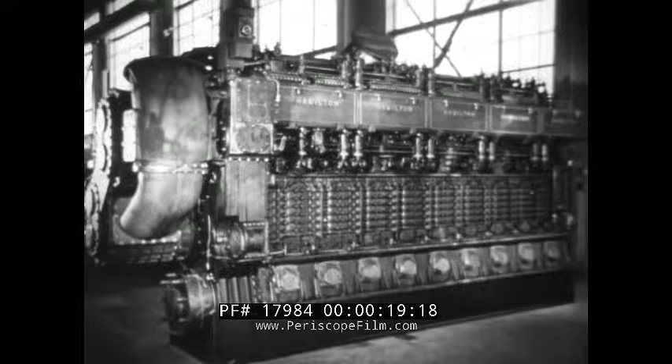Long ago, the people of southeastern Asia made use of an ingenious device called the fire piston or fire syringe. This consisted of a hollow tube, closed at one end, and a round stick that fitted snugly into the tube.

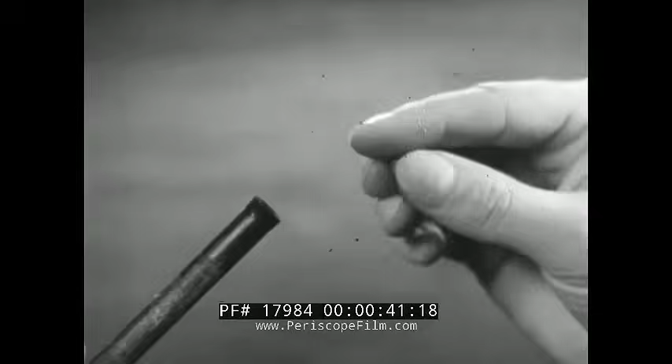Tinder was placed at the end of the round stick. Then when this stick or plunger was inserted into the tube and driven down quickly, the tinder took fire and burned.

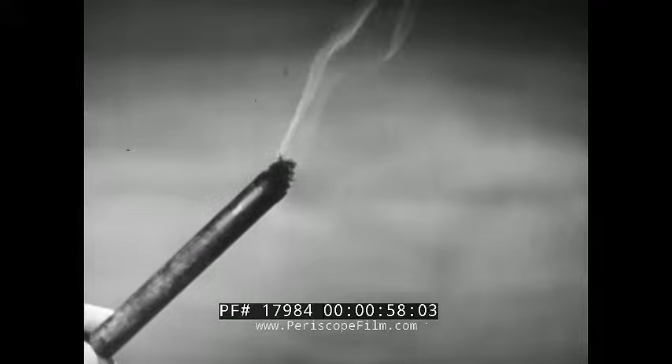Let's see what happens inside this fire-making apparatus. As the round stick or plunger moves down the tube, the air in the tube is trapped, squeezed into a smaller and smaller space. Finally, the tinder at the end of the plunger ignites.

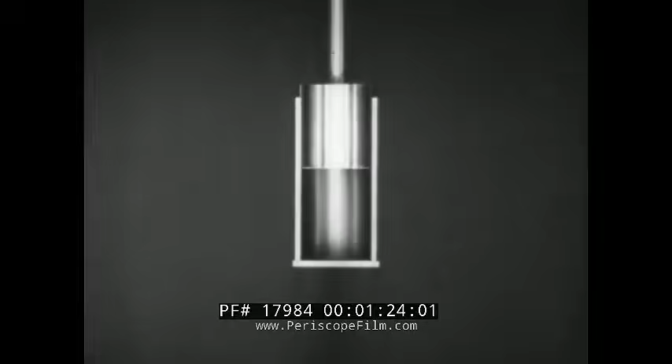To understand how this happens, let's construct a modern fire syringe. First, we turn the apparatus upside down. Then we put two thermometers in convenient places.

One of these thermometers will record the temperature of the air inside the cylinder, and the other registers the room temperature. Next, we add an instrument for measuring the air pressure in the cylinder in pounds per square inch.

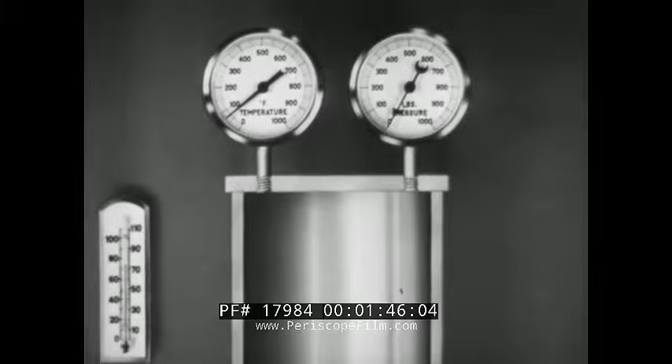With the piston in the down position, the pressure gauge on our apparatus reads 0, and both thermometers are at room temperature, 74 degrees.

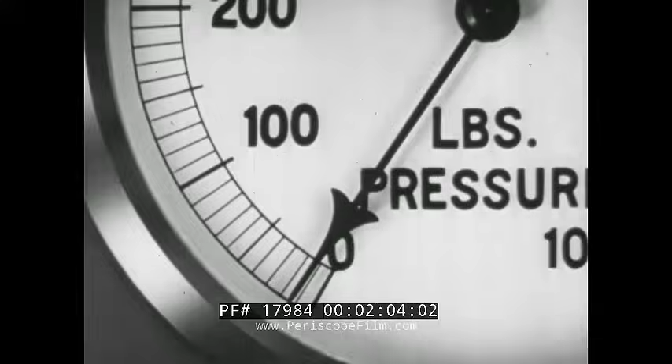We start compressing the air. As the piston goes up, the pressure rises. The temperature outside the cylinder remains the same. But inside the cylinder, the more the air is compressed, the higher the temperature goes.

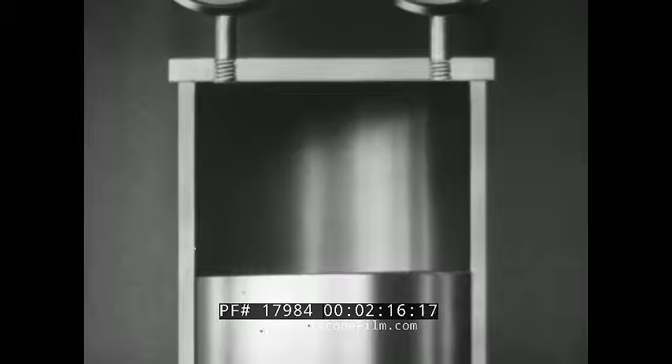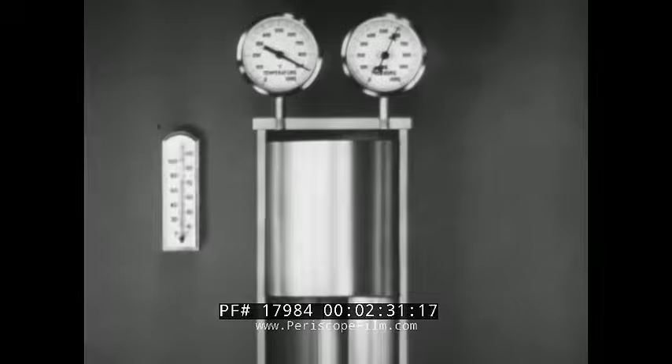Now the air in the cylinder is hot enough to boil water. Higher and higher go temperature and pressure. Now it's hot enough to melt tin, until finally the air is squeezed into about 1/16 of the space it occupied before we started compressing it.

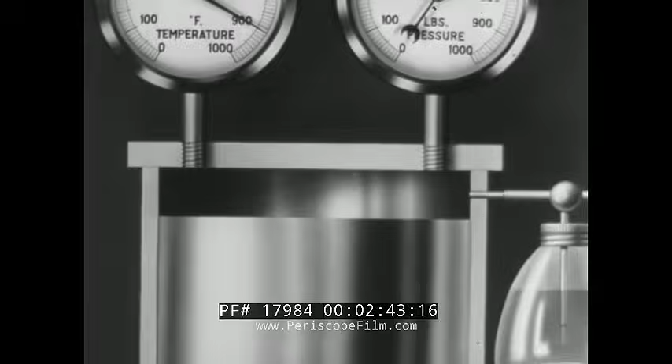At this point, the pressure and the temperature of the air within the cylinder are both extremely high - so high that a mist of oil sprayed into it will take fire and burn. This shows us that highly compressed air gets hot enough to ignite fuel oil.

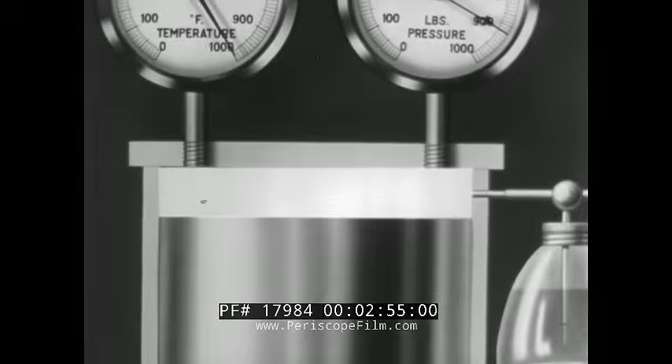This principle, called compression ignition, was first developed by Rudolf Diesel.

Now let's examine another phenomenon. We stretch a piece of rubber sheeting over the mouth of a container and place the container over a flame. As the rubber sheeting puffs out like a balloon, we see that air or gas expands when it is heated.

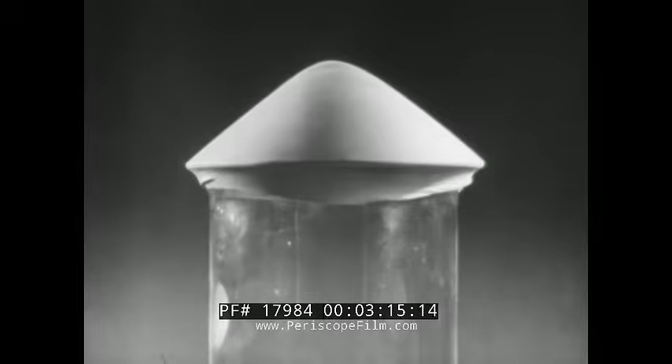Now let's see how this principle applies to our apparatus. First, the air in the cylinder becomes hot from compression. Then the burning oil raises the temperature still higher. This additional heat causes the gases to expand, forcing the piston down.

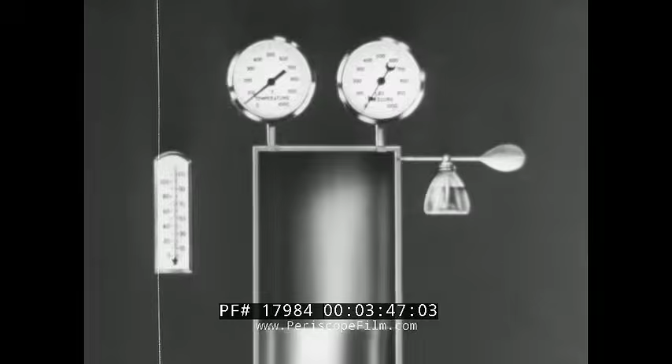Now let's convert this apparatus into a mechanism which will apply these principles of compression ignition and expansion to provide usable power. First, we take away the pressure gauge and the thermometers and strengthen the walls of the cylinder to withstand continued high temperatures and pressures.

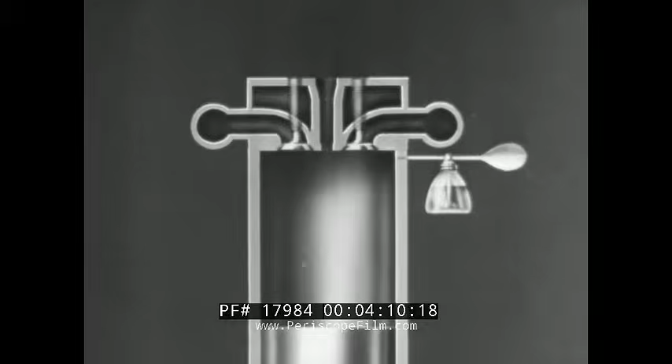We also need a couple of pipes or manifolds, one to bring fresh air into the cylinder, the other to carry the burned gases away, and two valves to seal the air in the cylinder while it is being compressed and while the oil is burning.

Next, we install a better atomizer, which we shall call the fuel injection unit.

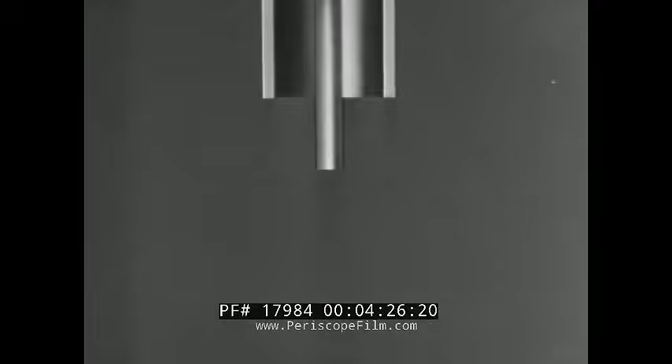Then, in order to transform the up and down motion of our piston into more convenient rotary motion, we change the piston rod to a connecting rod and add a crankshaft. And finally, to support our mechanism, we add a housing and a base.

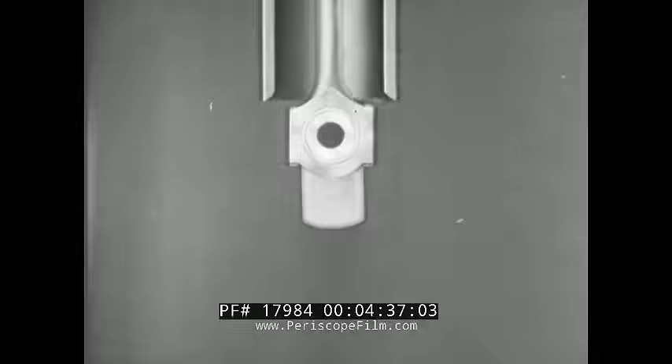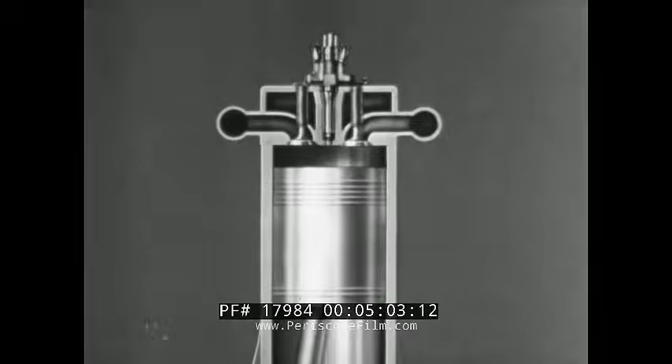Now let's see how this engine works. First, the intake valve opens, and as the piston moves downward, fresh air is drawn into the cylinder. Next, the intake valve closes, tightly sealing the air in the cylinder as the piston moves upward on its compression stroke. The fuel injection unit sprays fuel into the highly compressed hot air.

The oil burns, and temperature and pressure increase enormously, driving the piston down. The exhaust valve opens, the piston moves up, and the gases resulting from combustion are forced out.

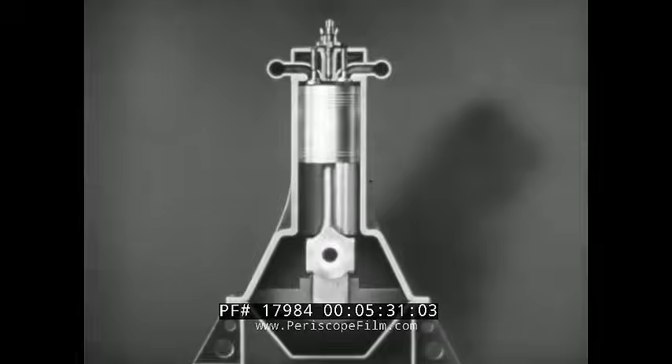This engine is called a four-stroke cycle diesel engine. One of every four strokes is a power stroke: intake, compression, power, exhaust. These four strokes of the piston occur every two revolutions of the crankshaft.

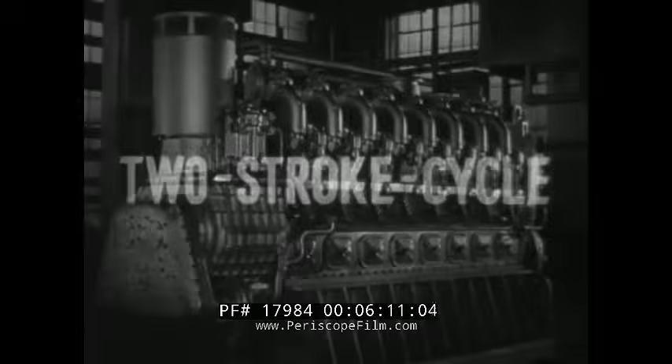In the 2-stroke cycle engine, the functions of intake, compression, power, and exhaust are performed in 2 strokes of the piston. This can be accomplished in several ways.

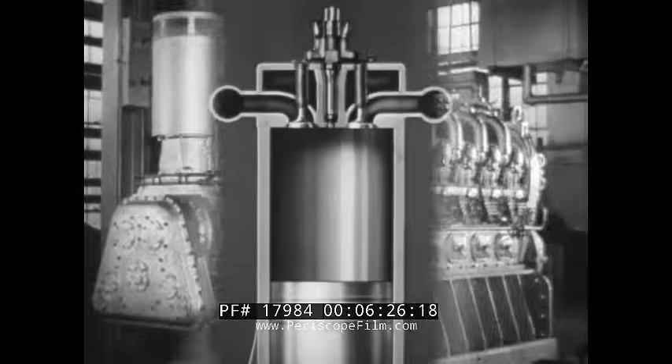In one design, the intake valve of the 4-stroke cycle engine is replaced by a row of openings in the cylinder wall. These are called intake or scavenge ports, which are supplied by a manifold with fresh air under pressure.

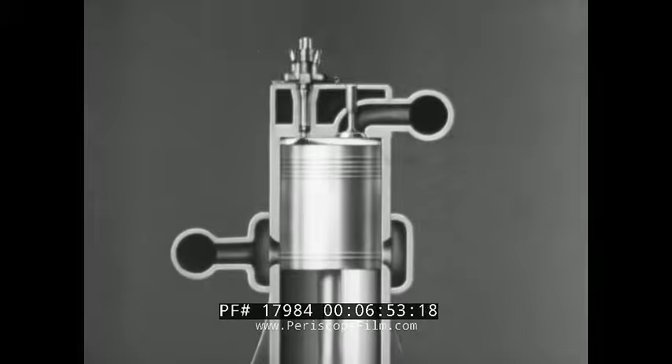Suppose this cylinder is full of fresh air. The cycle begins with the piston moving up. The air is compressed, and the resulting high temperature causes the fuel charge, injected near the top of the stroke, to ignite and burn. The combustion gases expand, forcing the piston down.

As the piston nears the bottom of the stroke, the exhaust valve opens, allowing the burnt gases to escape. Then the piston uncovers the scavenge ports, and fresh air blows out the remaining gases. The exhaust valve closes. The piston moves upward, covering the scavenge ports and trapping the fresh charge of air in the cylinder.

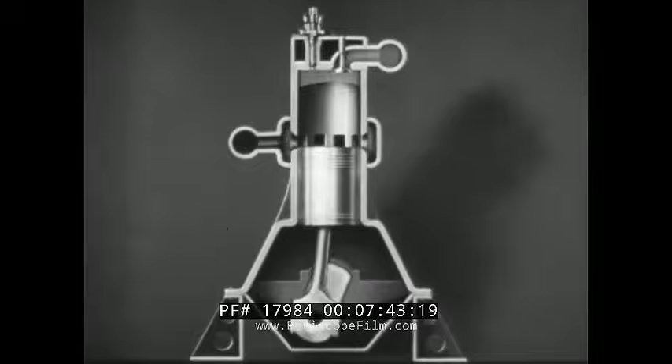Thus, the 4 processes of intake, compression, power, and exhaust are completed in only 2 strokes of the piston. Hence, every 2nd stroke of the piston is a power stroke, 1 power impulse to each revolution of the crankshaft.

The large Winton diesels used in some of our new submarines are of this type, 2-stroke cycle engine.

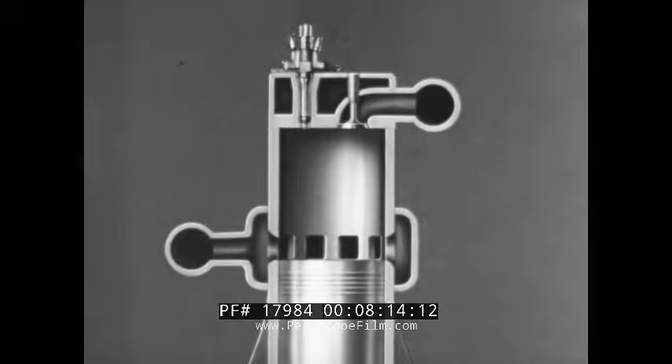In another type of 2-stroke cycle diesel, the exhaust valve also is replaced by ports in the cylinder wall. These exhaust ports are located opposite and slightly above the intake or scavenge ports.

Suppose the fuel has been injected and ignited by compression. Due to the added heat, the combustion gases expand, driving the piston downward. As it approaches the bottom of the cylinder, the exhaust ports are uncovered, allowing the exhaust gases to escape.

The piston continues downward, uncovering the scavenge ports. Fresh air, called scavenging air, is forced through these ports, blowing the remaining exhaust gases from the cylinder. The piston then passes through the bottom of the stroke. A fresh charge of air is trapped and compressed as the piston continues the upward stroke.

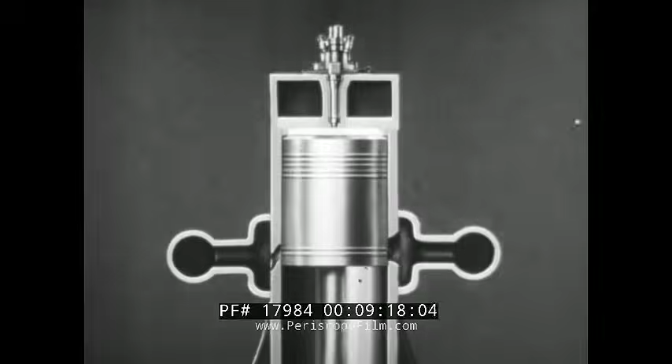Theoretically, a 2-stroke cycle engine should produce twice the power of a 4-stroke cycle engine of the same bore and stroke, since it does the same work in half the time. In practice, however, other factors reduce this 100% increase to an actual figure of 70 to 80%.

For instance, the loss of power resulting from the uncovering of the ports before the piston reaches the end of its power stroke. Also, the factors of less perfect scavenging and the diversion of power to drive the air pump.

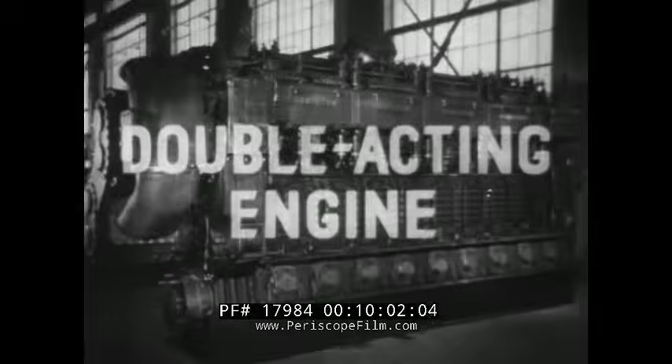When we apply the 2-stroke cycle principle to both ends of the piston, we have what is known as the 2-stroke cycle double-acting engine. The large Hamilton MAN engines in many of our new submarines are of this type.

In this design, combustion takes place on both ends of the piston. The piston is connected to the crankshaft by a piston rod, a crosshead, and a connecting rod. To prevent the escape of combustion gases around the piston rod, it passes through a stuffing box.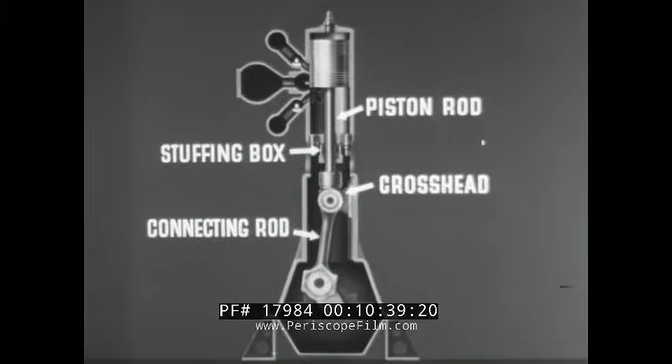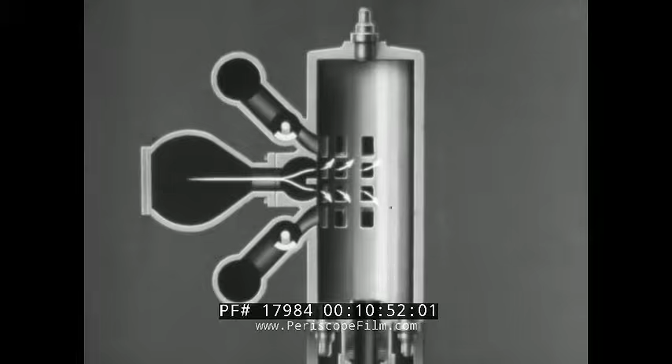There are 4 rows of ports in the cylinder wall. The 2 center rows are for the entry of scavenging air. The 2 outer rows are for the escape of exhaust gases. Injection valves for the injection of fuel oil are located at each end of the cylinder.

Let's start the cycle with the expansion of the combustion gases in the upper cylinder. The piston is driven down, first uncovering the exhaust ports, and the exhaust gases start to escape. As the piston uncovers the scavenge ports, the scavenging air sweeps out the remaining burnt gases, filling the cylinder with fresh air. The piston moves up, covering the scavenge ports.

At this time, a rotary valve restricts the exhaust passage enough for the scavenging air to build up pressure in the cylinder. The piston compresses the air as it continues its upward movement. The fuel is injected near the top of the stroke. Combustion takes place, and the cycle is repeated.

The same process takes place in the lower cylinder, the power stroke occurring at the same time as the compression stroke in the upper cylinder. Thus, each stroke of the piston is a power stroke.

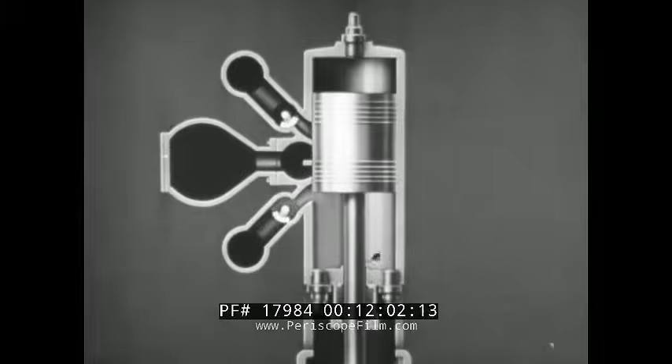Consequently, the double-acting engine develops about 70% more power than a single-acting 2-stroke cycle engine of the same weight and dimensions.

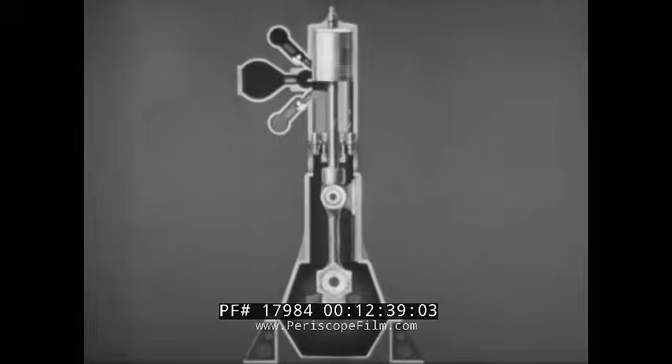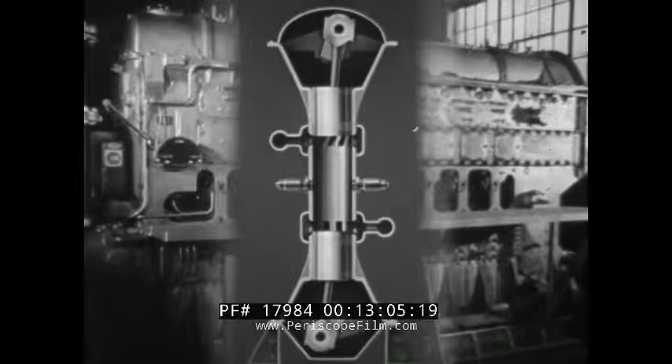The opposed piston engine, like the double-acting engine, commonly works on the 2-stroke cycle principle. This large Fairbanks Morse engine, used in our submarines, is an example of the opposed piston type. In this engine, there are 2 pistons in each cylinder, connected to separate crankshafts. The 2 crankshafts are connected by gearing, a chain, or a vertical shaft with bevel gears.

There is a row of ports at each end of the cylinder. Usually, the scavenge ports are at the upper end, and the exhaust ports at the lower. As the pistons move inward, they compress the charge of fresh air between them.

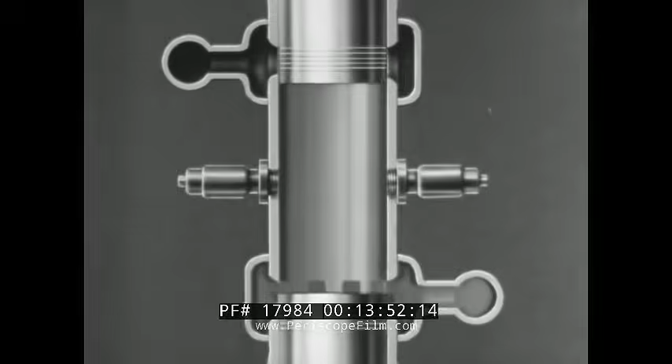At the inner point of the stroke, fuel is injected into the combustion space between the pistons. Combustion takes place, and the pistons are driven apart by the high-pressure gases. The exhaust ports are uncovered by the lower piston, allowing the gases to escape. Then the scavenge ports, uncovered by the upper piston, admit fresh air to blow out the remaining exhaust gases, and the next cycle begins.

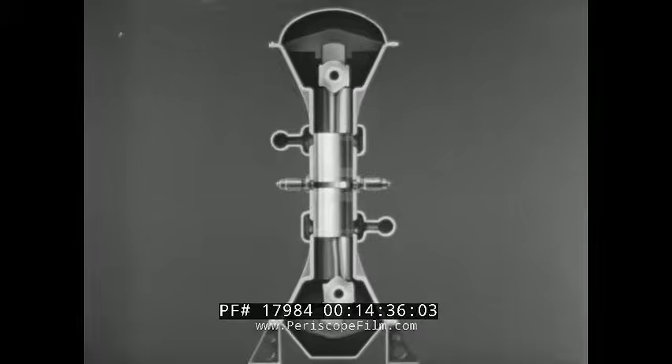The lower crankshaft is advanced about 15 degrees so that the exhaust ports are opened and closed before the scavenge ports. The opposed piston engine develops about the same power as the double-acting engine of similar bore and stroke.

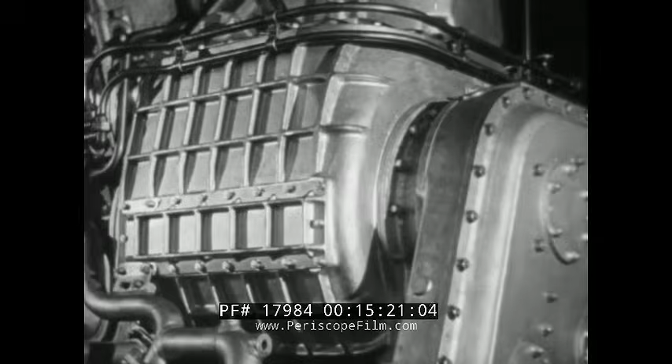In all the various types of two-stroke cycle engines, the functions of intake and exhaust are mainly performed by an air pump or scavenging air blower. A typical example is this model, called a multiple lobe positive displacement blower.

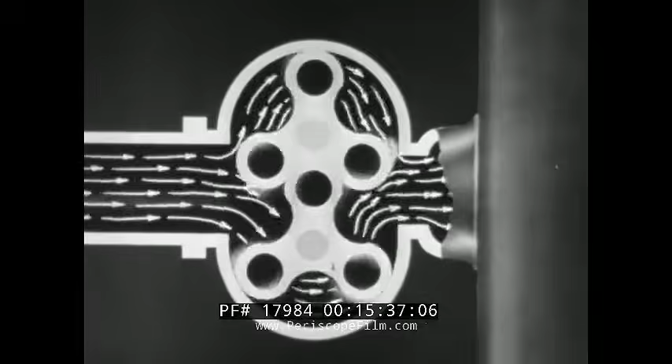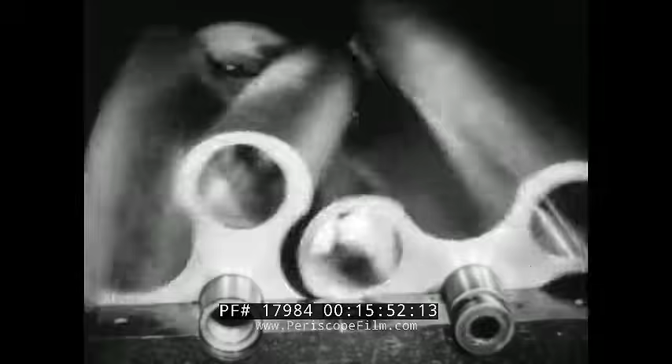Inside an airtight housing, two rapidly turning impellers trap the air between their lobes and the wall of the housing, discharging the air at a pressure of 2 to 5 pounds per square inch above atmospheric pressure. These helical lobed impellers are designed in this manner to deliver a uniform amount of air and to reduce noise. They are machined and finished to very close tolerances on machines especially designed for this purpose.

There are several types of scavenging systems in two-stroke cycle engines. In most scavenging systems, the air passes through a silencer before it enters the blower. In all of them, the fresh air is forced into the cylinders by the blower through a pipe called the scavenging air header.

In the Uniflow system, the scavenging air flows directly through the cylinder from one end to the other. In the loop system, it flows around the cylinder in a loop, entering and leaving on the same side. In the direct method, the scavenging air enters at one side of the cylinder and leaves on the opposite side.

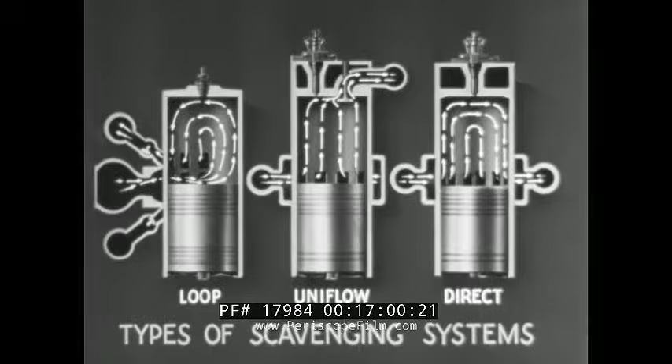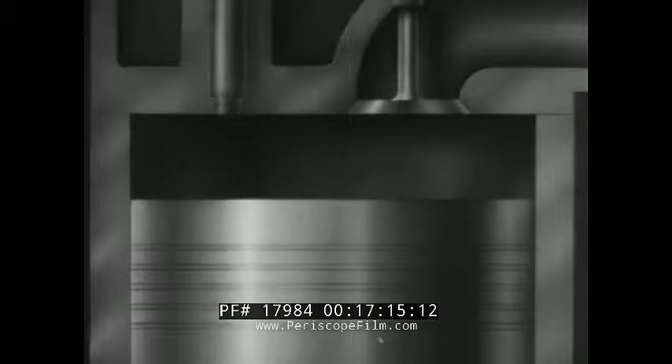The purpose of supercharging is to step up the power output of the engine. Every particle of fuel requires a certain amount of air for complete combustion. By increasing the density of the air charge at the beginning of the compression stroke, more fuel may be injected and burned, thus increasing the power output.

The four-stroke cycle engine is supercharged by forcing air into the cylinder under a pressure of 5 to 12 pounds per square inch above atmospheric pressure. This increase in the density of the air charge results in higher combustion pressures and consequently more power.

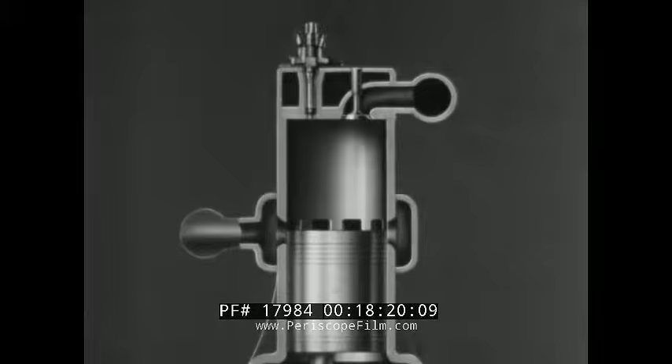Some two-stroke cycle engines are supercharged by trapping air in the cylinder at scavenge air blower pressure. When valve scavenging is used, the exhaust valves are timed to close before the scavenge ports are covered by the piston. This timing increases the pressure of the air before compression by 2 to 5 pounds per square inch above atmospheric pressure.

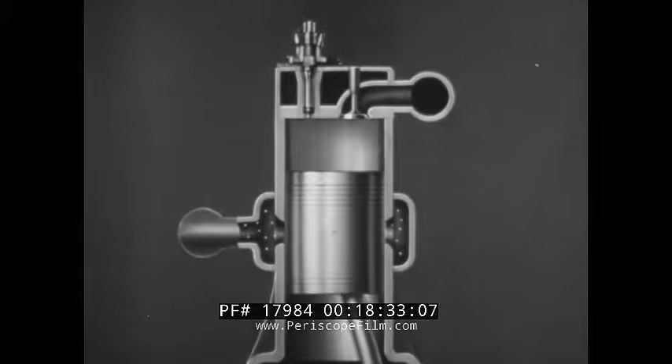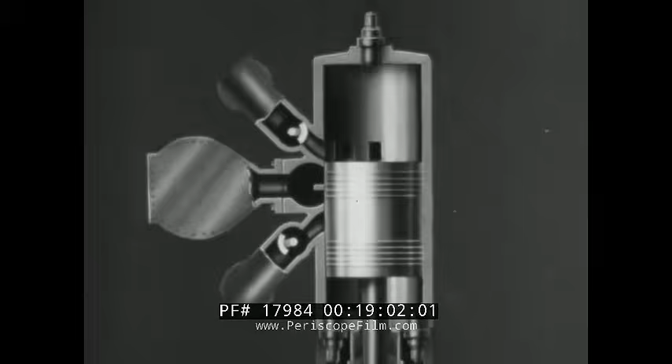In the double-acting engine with loop scavenging, a rotary valve is provided for supercharging. This revolving supercharge valve in the exhaust passage is timed to close shortly before the piston covers the scavenge ports. Thus, scavenging air pressure is maintained until compression begins.

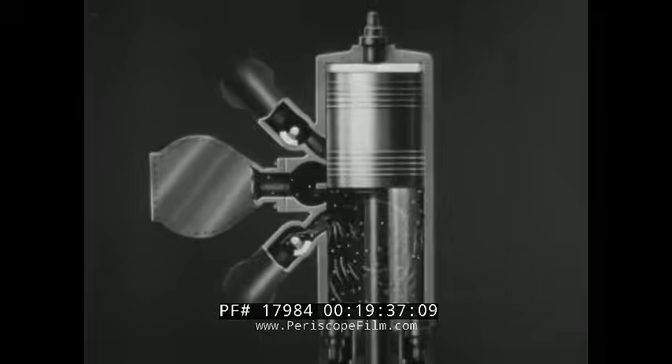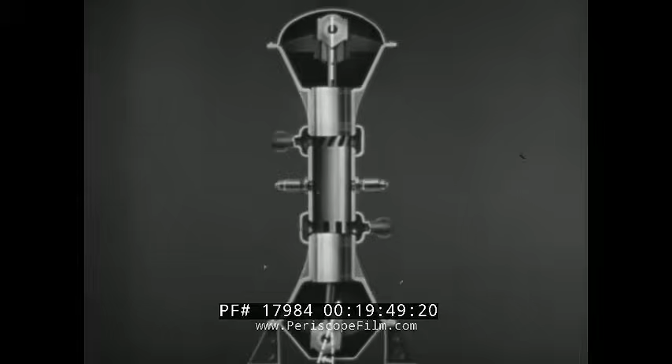The opposed piston engine is supercharged by setting the crankshafts so that the lower piston leads the upper. Because of this so-called lower crank lead, the exhaust ports are covered ahead of the scavenge ports. This permits the scavenging air to continue entering the cylinder after the exhaust ports are covered. Hence, the air in the cylinder is supercharged to the scavenging air pressure.

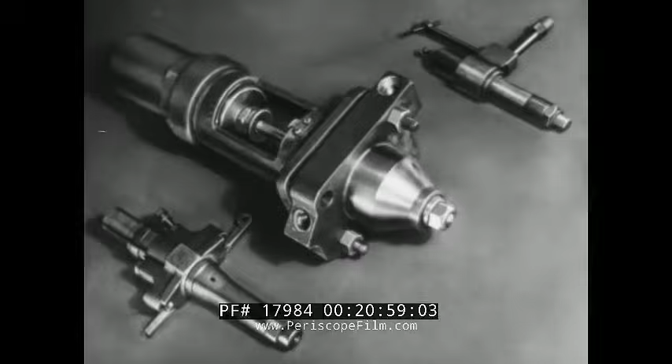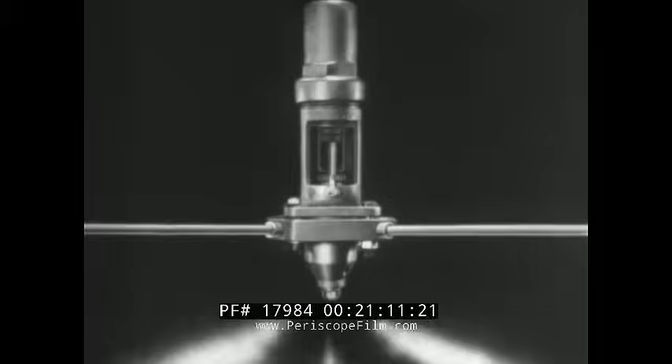There are two general methods of injecting the fuel into a diesel cylinder: the air injection system and the mechanical or solid injection system. The air injection system utilizes high-pressure air to force the fuel into the cylinder through the nozzle of a spray air valve. This breaks up or atomizes the fuel into a fine spray.

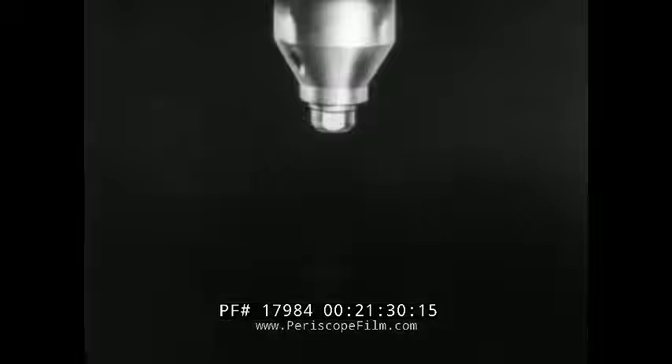To overcome the high pressure within the cylinder, an air pressure of 600 to 1,000 pounds per square inch is required for injection. This high-pressure air is usually supplied by a compressor of the multiple tandem stage design, in which the air is compressed in steps or stages.

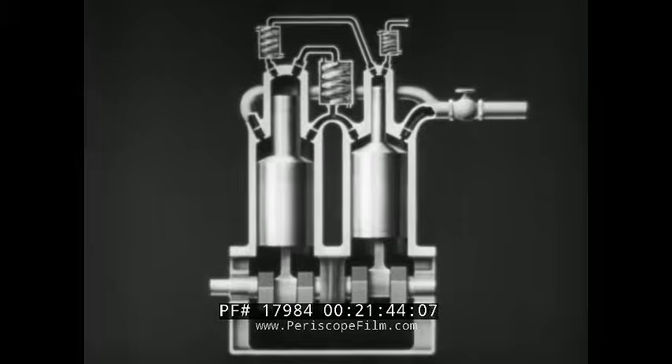The Nelseco engine, installed in a large number of S-type submarines, uses a three-stage air compressor of this type.

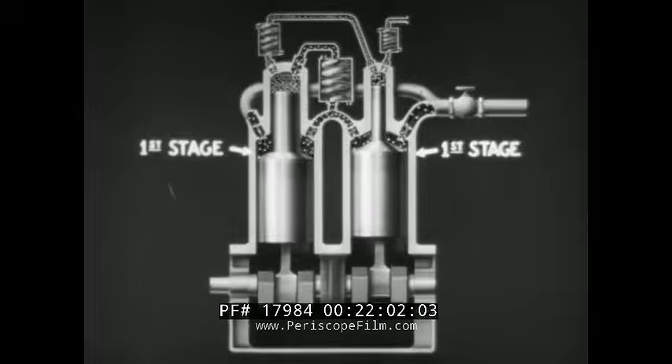Each piston has two steps, and the air is compressed in three stages. The first stage compression takes place in the large cylinders. The second and third stages of compression take place in the two cylinders above the first stage pistons.

Circulating seawater coolers are provided after each stage to carry away the heat generated by compression. After the final stage, the compressed air is carried to the spray air valves.

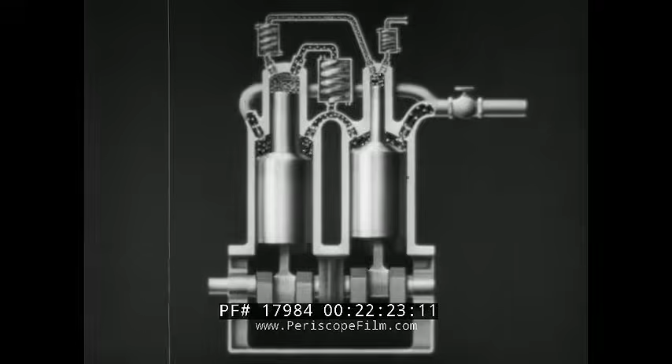The plunger and the suction valve are operated by a cam and tappet arrangement from the engine camshaft. The discharge valve is held closed by a spring and opens under oil pressure.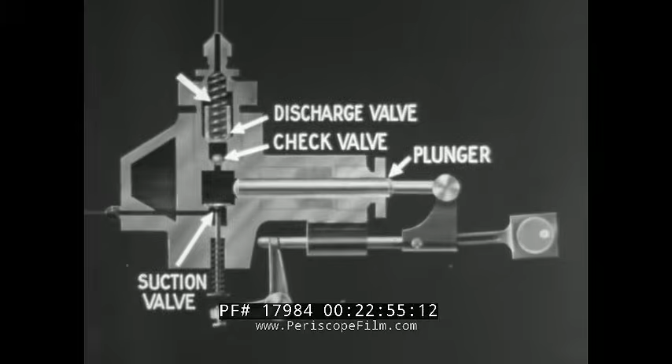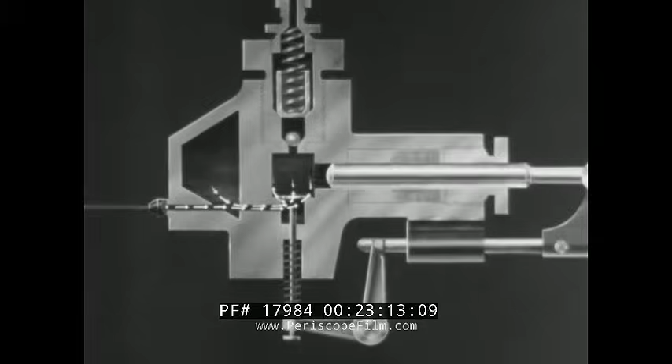As the plunger moves outward, the suction valve opens and fuel oil is drawn into the pump chamber. Through the first part of the plunger's pumping stroke, oil is returned to the supply chamber as the suction valve is gradually closed by the tappet arrangement.

When it is completely closed, the remainder of the pumping stroke forces the fuel up through the discharge valve into the line leading into the spray air valve.

The point at which the suction valve closes is controlled through the lever and tappet arrangement by the engine throttle or the governor. The length of the effective pumping stroke is thus regulated so that only the required amount of fuel is pumped into the spray air valve.

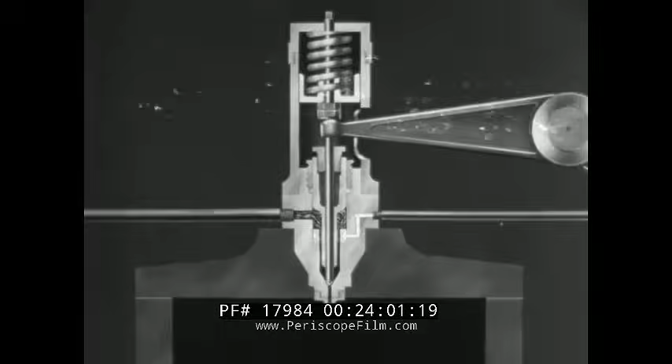The air from the compressor and the oil from the fuel pump are piped to this typical spray air valve. The fuel enters the chamber surrounding the valve stem.

This chamber is filled with spray air at a pressure of 200 to 500 pounds above the pressure in the engine cylinder.

When the valve stem is lifted, this difference in pressure blows the fuel through the nozzle into the cylinder in the form of a fine spray.

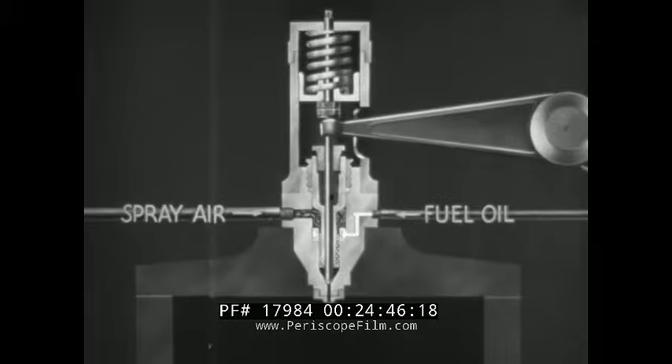The mechanical or solid injection system requires no high-pressure air. The fuel itself is under pressure great enough to atomize and inject it into the cylinder.

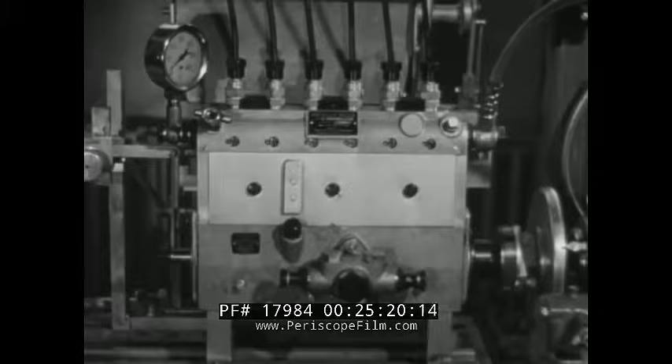The primary units of this system are a fuel injection valve and a fuel pump. Most of the diesel engines in the submarine service have an individual fuel pump and an injection valve for each cylinder. The fuel pumps for an engine may be separate, or they may be grouped together in a common housing.

The Bosch fuel pump, used on the Fairbanks, Morse, and Hamilton MAN engines, has a plunger and a barrel, and a discharge check valve. The effective stroke of the plunger may be adjusted for different engine loads by a rack and gear, which rotate the plunger.

The plunger is driven off the camshaft. When an engine piston nears the end of its compression stroke, the pump for that cylinder forces a measured amount of fuel up to the injection valve.

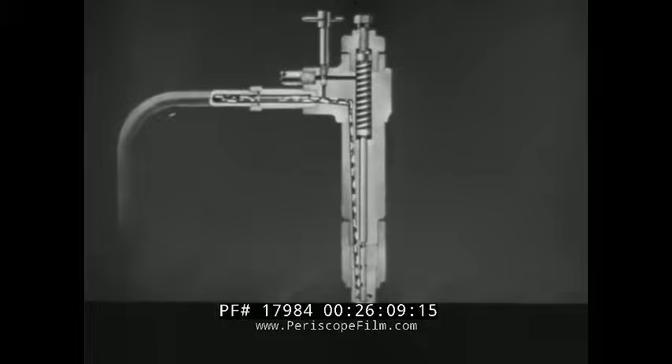The oil pressure opens the injection valve, and the oil passes through the injection nozzle into the cylinder.

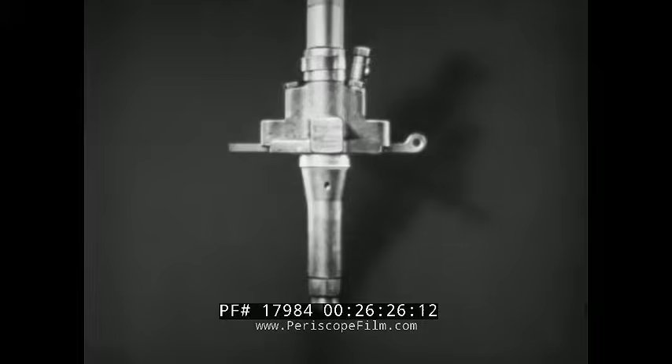Another type of mechanical injection system combines the pump and the injection valve in a single unit. This type, used on the Winton diesel engine, is called the Winton unit injector.

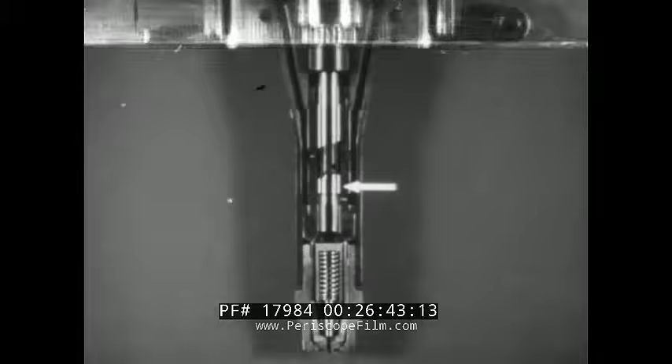This injection unit consists of a plunger, a gear and rack, a needle valve, and a spray tip. The rack and gear rotate the plunger, changing its effective pumping stroke and thus controlling the quantity of fuel injected.

Fuel oil fills the barrel below the plunger. The fuel is forced down by the plunger, and when enough pressure has been built up, the needle valve is lifted from its seat. The fuel is thus forced through the tiny holes in the spray tip into the cylinder.

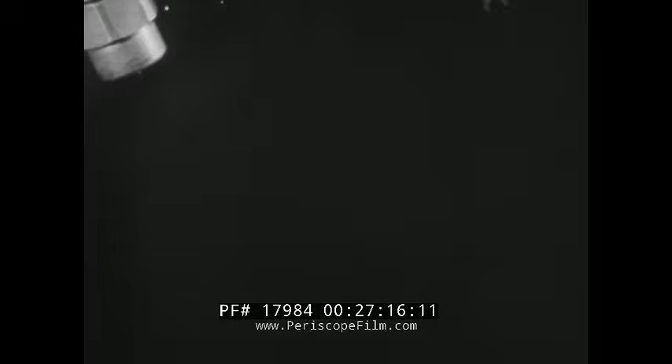The degree of atomization is determined by the velocity of the fuel through the spray holes. At the full speed of the engine, the oil shoots from the spray tip of this injector at 13 miles a minute, a velocity greater than that of sound.

The fine atomization of the spray ensures prompt ignition and complete combustion, vital features in the efficient operation of the diesel engine.